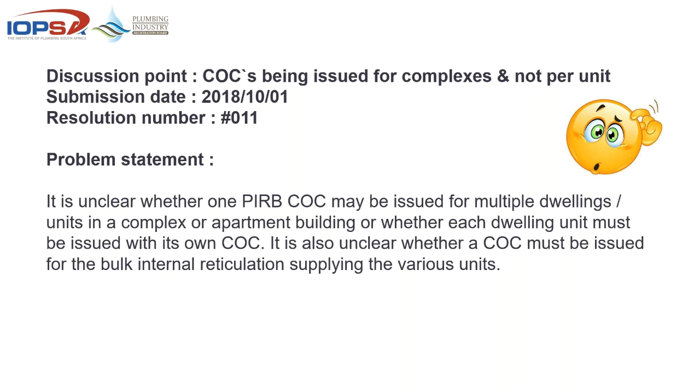So if you get a phone call from an IOPSA compliance auditor and you've issued one COC, you'll see that if you look at a development like that, you might be in for a long afternoon or maybe a day or two.

So the resolution that was required at the time was to confirm whether a COC must be issued for each individual occupancy in an apartment block or similar multiple unit installations.

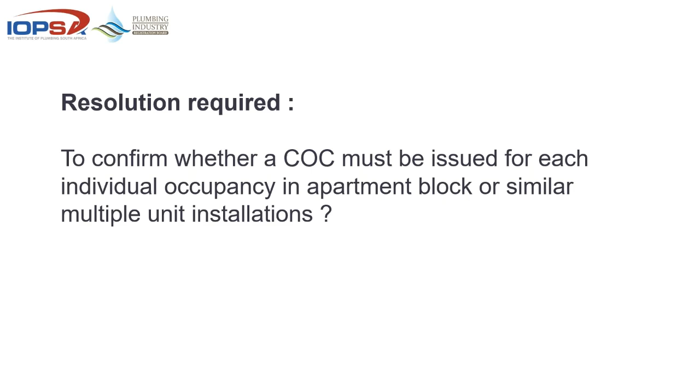So the first of our reference documents ended up being the Water Services Act. We've seen this extract in a couple of these presentations, and let's put it this way, the biggest hammer out of the whole lot starts with the Water Services Act. Clause 13, the first section deals with the local authority or the water services institution must within 2 years fit water volume measuring devices.

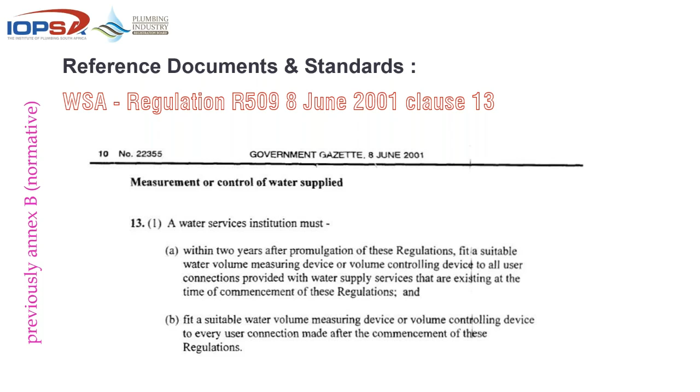So I'm going to skip through A and B and head straight to where the developer and the plumber gets involved. The same clause 13, section 2 says, if constructed or installed after promulgation of these regulations, a suitable water volume measuring device or volume controlling device must be fitted to separately measure or control the water supply to every individual dwelling within a new sectional title development, group housing development, or apartment building.

So if we look at point A, it covers just about every type of occupancy other than a normal freestanding dwelling. Because if you're in a sectional title development, whether it's a body corporate or group housing where they have a homeowners association, or an apartment building, could be a block of flats. The other B and C is for commercial and institutional, and then obviously irrigation, but I doubt there's still local authorities that allow irrigation to happen via their water supply.

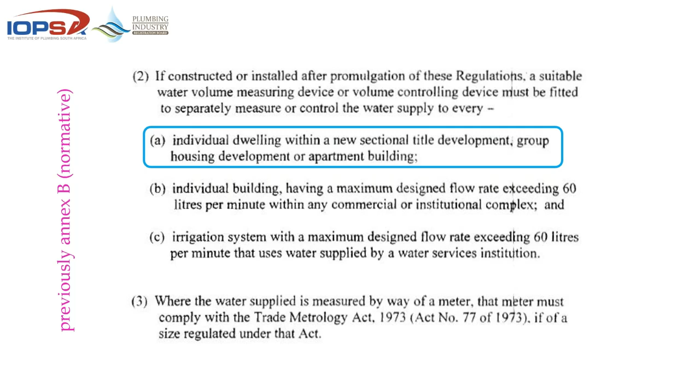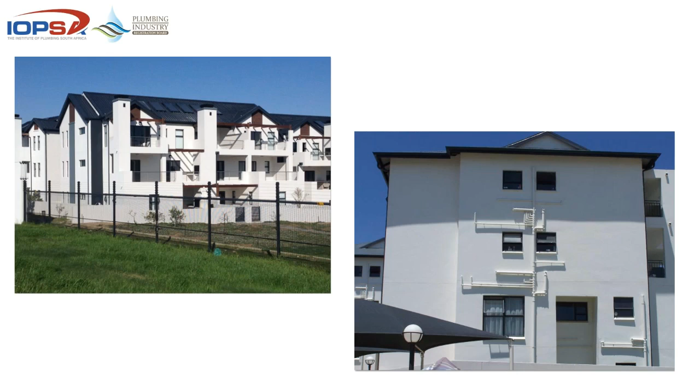So if we look at that portion there, and you look at developments as they're going up across the country, you'll find that in this case you can see the external drainage visible. There's no sign of metering, there's no sign of the water pipes or anything here. So you'll see that when we're talking about the main reticulation outside, we'll have a look in depth now. But the theory is that if you look at that development there, you can see it'll be, if you had to call out to provide a quote to install sub-metering, it might be a bit of a hassle.

Then the next document that we're looking at would be SANS 10252 Part 1, 2018. Section 6.1.1.3 says general installation serving premises of separate occupancy shall facilitate individual metering.

And here's a typical example of what it should not look like. You can imagine if units, say 6 of them, 2, 4, 6, 8 of them, plastic supply on a combined installation. You can see these things are almost impossible to trace. It's not fixed properly, it is just all around deurmekaar.

But the point is that if that is a combined installation, obviously you can't have a plastic pipe supplying your fire protection. So this is a typical example of how not to do it, but the requirement from the standard is very clear: any general installation serving premises of separate occupancy shall facilitate individual metering.

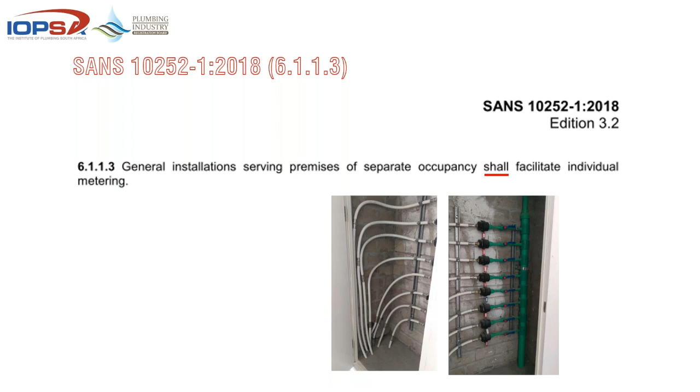The next document we referred to was the National Building Regulations, which just popped into Part A. We'll start with H4. H4 is a normal dwelling house, an occupancy consisting of a dwelling unit on its own site, including garage and other domestic outbuildings, if any.

So if it's a normal freestanding or freehold property, H4 applies, and it refers to a dwelling unit on its own site, including a garage.

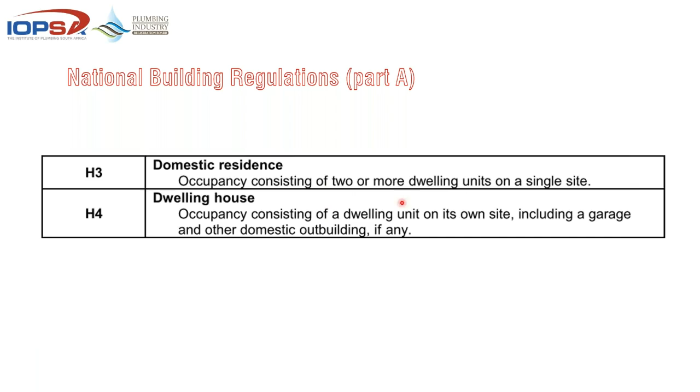When we move into the one we're busy discussing, H3 is an occupancy consisting of 2 or more dwelling units on a single site. Once you go 2 or more, it could be 80, it could be 100 - it's 2 or more on a single site. That's when it becomes a bit more complicated.

So let's have a look at the reasoning around these documents. Both documents require that water meters shall be supplied for each dwelling, whether it's H4 or units in separate occupation in H3. The responsibility for the entire installation downstream of said meter supplying that unit is the responsibility of the individual owner.

Take note, the individual owner - even in a sectional title, those portions or sections that belong to that individual are the responsibility of that owner. The COC must therefore be issued to the owner of that unit.

The whole distribution reticulation to the separate units is the responsibility of the body corporate or the homeowners association, and is also subject to the water regulations, bylaws, and mandatory standards.

Therefore, a COC must also be issued to the body corporate or the homeowners association for workmanship on the distribution system supplying the different dwelling units, and also in the communal areas and other facilities not in private ownership.

So if you happen to have a pool with a change room area, or an entertainment area, or a boma or lapa somewhere in the middle of the complex that's a communal thing, that would obviously not belong to the owner of the units. It would belong to the body corporate, along together with the main reticulation, and they're obviously responsible for that.

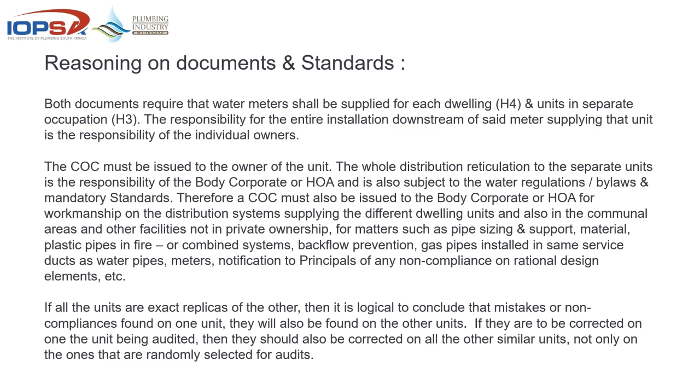So we look at a typical example of what should not be happening and, unfortunately, what is.

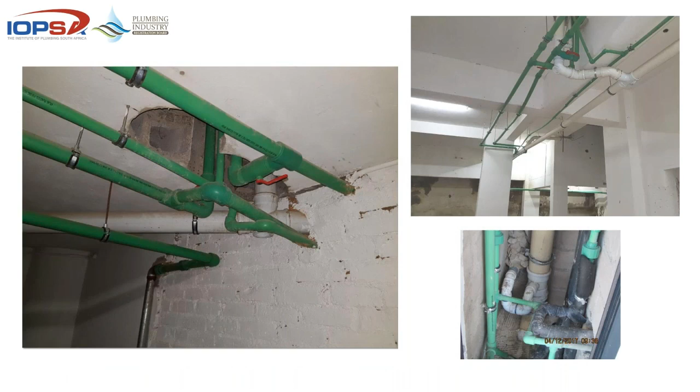The same thing applies when we mention support of pipework and ducts - you can see this is a vicious example of how it shouldn't be done.

But now this, left in the basement or in a parking garage, belongs to the homeowners association and the body corporate. So that's not part of the actual unit.

So when we look at these duct areas, the common areas not in separate occupancy - somewhere along the line, the levies being accumulated are going to be used to sort this out. But there should be a COC for this, and then separately for the individual units.

If we look at the terminology used in the National Building Regulations, sections A, P, XA, etc., and its reference standards, that is the actual regulation that tells the building control officer what they should be looking at and what is the law, and the application of that, in other words SANS 10400 or other reference standards.

They all indicate that it covers every building and dwelling unit in separate occupation on a property as subject to its own requirements. The on-site and in-building hot and cold water, as well as drainage reticulation serving those individual dwellings, are also subject to those regulations regarding compliance for installation and maintenance of the structures and services, including the plumbing. Recently, it was necessary...

Legal opinion on this matter was obtained by PIRB, and it confirmed that separate COCs should be issued for each dwelling unit in separate occupation. So we've had an incident where it was necessary to confirm that, and it has been done. It made our life slightly easier with regards to the decision on whether you should have separate or single ones, and the legal opinion was that you need to have them separate.

So if we look at the consequences of non-compliance: every owner of a house or flat, apartment, and every body corporate has the right to protection provided by a COC issued by a plumber licensed by the SAQA Professional Body for Plumbers, in this case PIRB, which holds the plumber responsible for ensuring that the new installation, repair, or replacement work done is in compliance with the regulations and national standards.

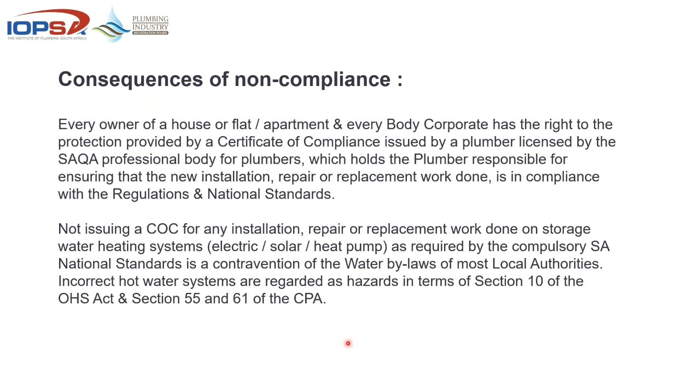The law holds the owner of any property responsible for the safety and compliance of the hot water services, and the law holds the plumber doing any replacement, maintenance, or repair responsible to notify the owner in writing of any non-compliances in the pre-existing heating system.

The random checks by PIRB on issued COCs check that this is being correctly done. The PIRB in turn can also protect the plumber who has correctly issued a COC for compliant work, in case of disputes regarding the implementation of the regulations and South African National Standards.

So there are, well, less and less of them, but there are still guys of the opinion that the PIRB is only there as a stick to beat the licensed plumbers. That's not the case. You can have a look at that.

If you've done your work correctly, issued the notices, and done even new work as per the standards, and issued the COC, then the PIRB can protect that licensed plumber who issued the COC in case of a dispute. It happens — sometimes it's a necessity — but like I say, it happens less and less.

A COC, okay sorry, the resolution that we came to was straightforward: a COC must be issued for each individual dwelling unit, and not one COC for a complex with multiple dwelling units.

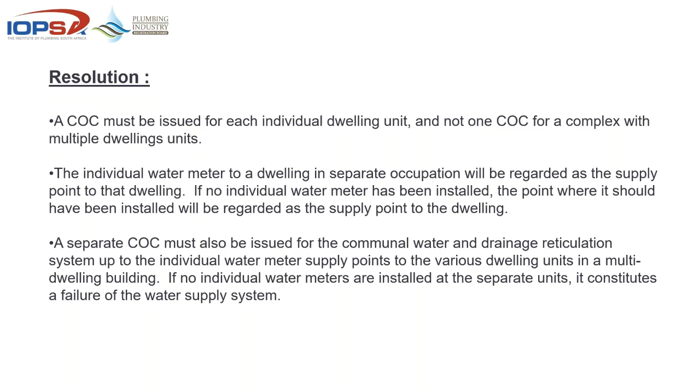So as far as that resolution is concerned, have we got any questions?

Yes, Aldrin. The first one, which local authorities do not require a COC?

The COC is required by the standards, 10254 for the geysers, 10106 for the solar, and 1352 for the heat pump. The local authorities require, or the majority of them require, compliance with that standard. So when you're doing a water installation, it needs to comply with 10252 part 1, and then the second one they quote would be for the storage water heaters to comply with 10254.

I'm not sure, the majority of the ones I've got ask for that. There are one or two that refer to their own, or they need to have them inspected. There are deviations from the norm. Not 100% sure which ones do not ask.

The best would be to actually just get a copy of your local authority bylaws, either from them. It's normally something like R8 or R10 that you pay for a copy, or even easier, get onto your smartphone, log onto your municipal website, check under downloads, and you'll find the water services bylaw. Just a heads up, make sure you download the correct one, because a lot of municipalities have two water services bylaws. One deals with the actual payment and supply of the water, and the other deals with the technical side around the water and drainage. So you'll have to check each municipality on its own.